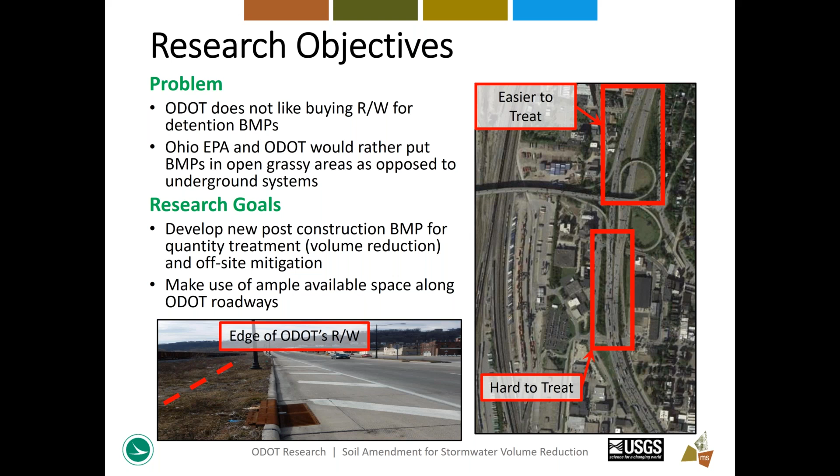As demonstrated by the image on the right side of the screen, narrow, impervious roadway corridors don't provide a lot of opportunity for stormwater management, except for underground detention or manufactured systems. These areas are hard to treat. However, the areas, as you can see in this image on the north side of this picture, have a nice wide grassed median that can provide more cost-effective stormwater treatment. That is what this prospective BMP aims to take advantage of.

This project was kicked off in May of 2017, which, as hard as it is to believe, was over 4.5 years ago. We conducted 1 year of existing conditions flow monitoring, which ran from March of 2018 to March of 2019. Monitoring was suspended during winter months because snow and ice may interfere with our runoff data and skew our results. I'll cover more details on the flow monitoring setup and the equipment in the next few slides, but essentially we wanted to establish a baseline and determine how much runoff is occurring along typical ODOT roadways currently.

Then we installed various amended soils, which again I'll cover in more detail in the next few slides. After the amendments were installed, we conducted over 1.5 years of post-amendment flow monitoring to see what impact the soil amendment had on runoff quantity. The runoff data analysis will be covered in detail by Greg a little later on. And now we're in December 2021, and we are wrapping up our final reports and recommendations to ODOT.

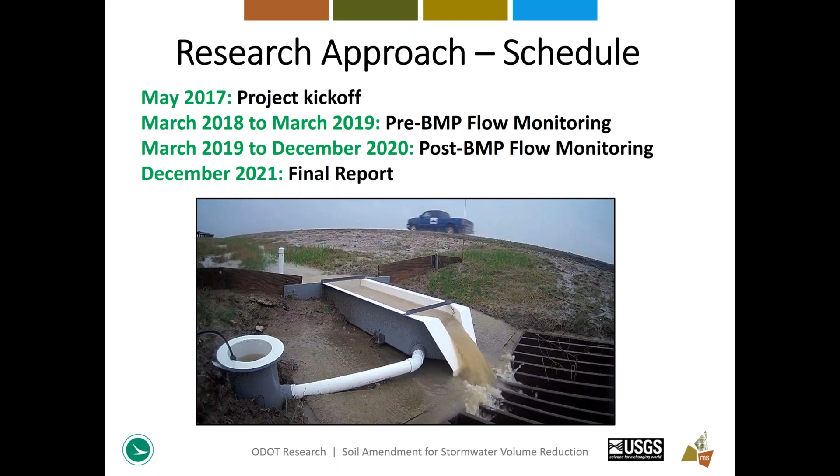The research team found sites across the state of Ohio that were ideal for flow monitoring. The criteria consisted of grass shoulders and side slopes within ODOT right-of-way. We looked for areas that were generally consistent with the current vegetated filter strip BMP, that is, wide, grassed, shallow slopes that receive sheet flow from the roadway.

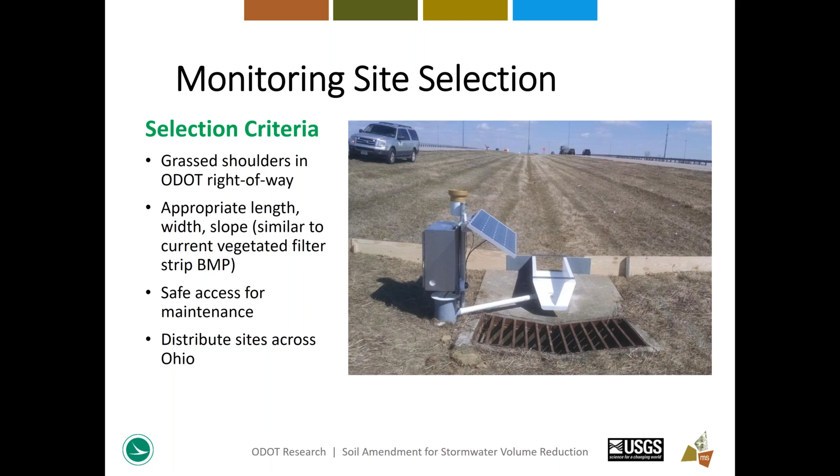We found that medians provided the best location due to the controlled drainage area. There is no contributing drainage area from outside the ODOT right-of-way, and a high percentage of the flow was from the paved roadway. We chose wide medians that provided ample safety for installation and maintenance crews. We also looked for areas with guardrails to protect equipment and crews when possible. Distributing the sites across the state allowed us to capture a variety of rainfall patterns.

This map shows the 12 monitoring sites that we selected. There were 4 along State Route 161 and State Route 16 between Columbus and Coshocton, and another 8 sites along US 30 from Bucyrus to Canton. 2 of these sites were control sites, which did not have any soil amendments performed. The control sites were co-located next to another site that was amended.

As you can see in this image, we've used a color coding system. The green and yellow boxes are there to show which sites were co-located with control sites. That color scheme will be mentioned later on by Greg. BMP 2 and control site 1 were co-located, and BMP 6 and control site 2 were co-located. This allowed for a direct comparison of runoff between an amended site and a non-amended site. The control sites also helped identify any major environmental or rainfall changes between the 2 monitoring periods and helped isolate runoff variables during data analysis. Again, Greg will cover this in more detail shortly.

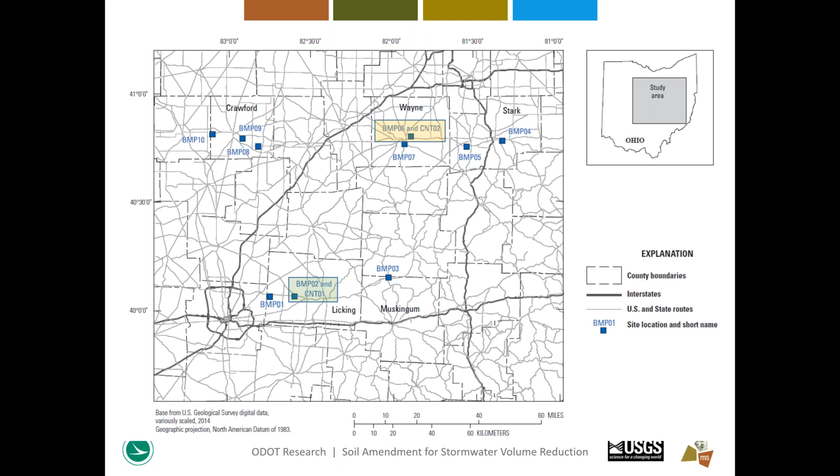This picture shows the monitoring equipment setup installed at each monitoring location. Rainfall was captured using a tipping bucket rain gauge, and flow data was captured through H-flumes, which were installed in the ditch line just upstream of an existing catch basin to capture all flow coming off the roadway. Wing walls prevented flow from bypassing the equipment, and during periods of runoff, photos and data were collected at 1-minute intervals and transmitted to USGS via cellular data, all this powered by solar panels.

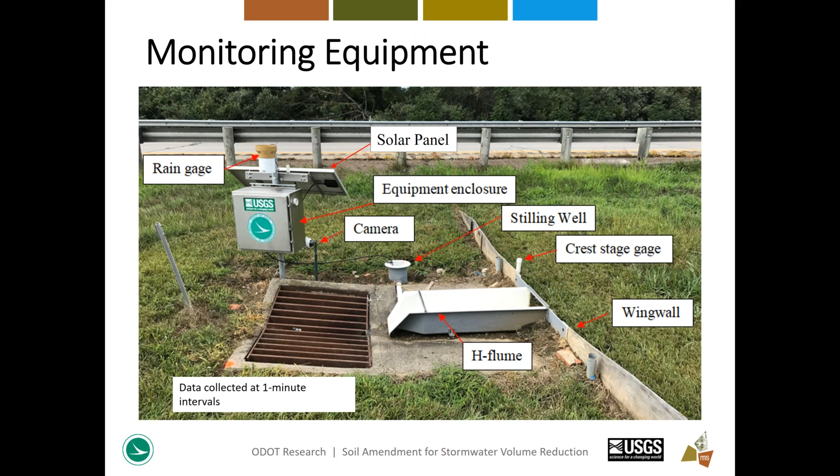The research team evaluated numerous natural and manufactured soil amendment materials with the intended goal of improving the soil porosity, texture, and capacity to hold moisture in order to improve the soil's long-term capacity for infiltration and exfiltration. The team decided that sand, expanded shale, and compost would be the best materials to install for field testing.

For those who don't know, expanded shale is formed when shale is crushed and fired in a kiln. This process causes tiny air spaces and air pockets in the shale to expand, making a semi-porous aggregate. The idea was that the sand or expanded shale could provide the infiltration and moisture capturing benefits, while the compost would provide vital nutrients and organic content to maintain robust vegetation, which will also aid in runoff reduction.

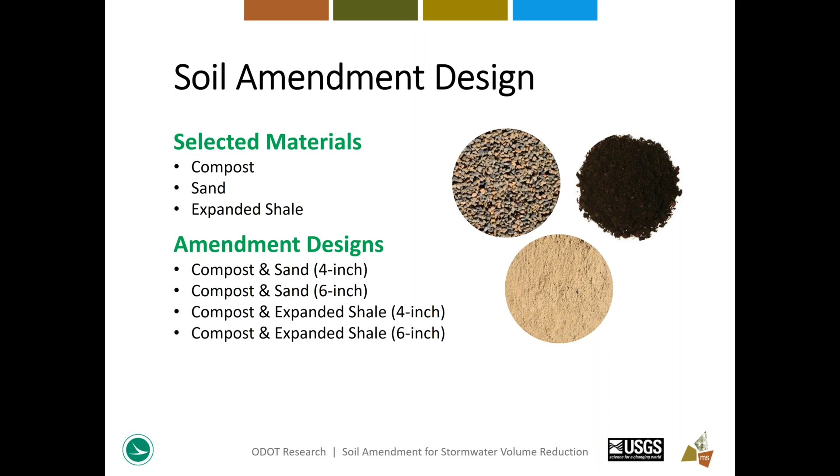We decided to leave the bottom of the median swale undisturbed. This is because we wanted to measure the effects of the soil amendment on the sheet flow across the side slopes, and not necessarily the soil amendment's impact on concentrated flow in the ditch line itself.

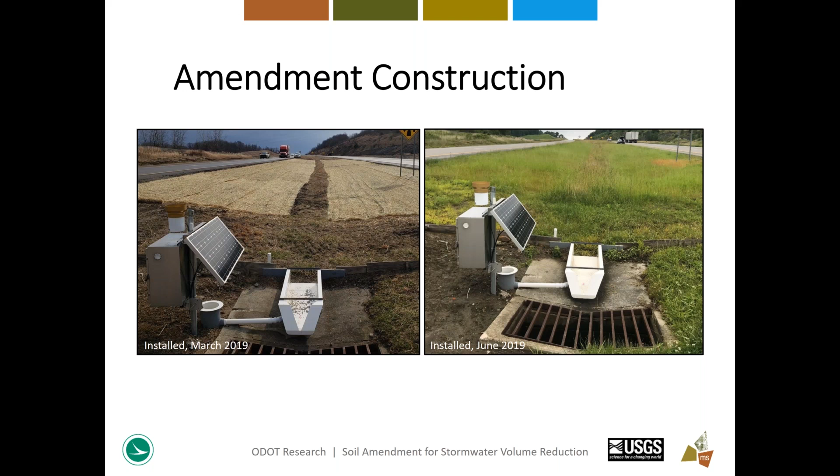These pictures show the monitoring sites immediately after the soil amendments were constructed. The image on the left is in March 2019, immediately following construction, and then a few months later in June 2019, after the vegetation had a chance to reestablish. Now I'll turn things over to Greg Colton to discuss how we analyze and compare the pre and post BMP flow data.

Thanks, Justin. So we ended up computing data for what we called events. An event begins when the first 1/100th of an inch of rainfall is recorded, and it ends when the measurable rainfall and runoff both have ended for at least 3 hours. The events were divided into 2 periods. One we called a pre-BMP period, which was before the soil amendments were installed, and the other was the post-BMP period, which is the period after soil amendments were installed.

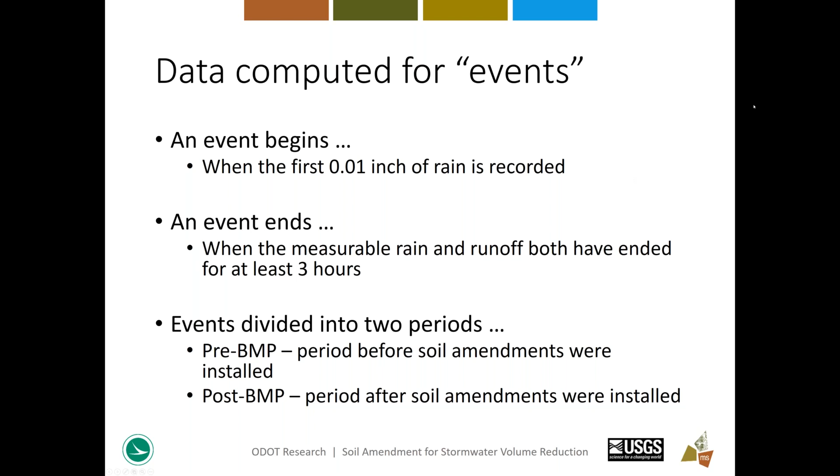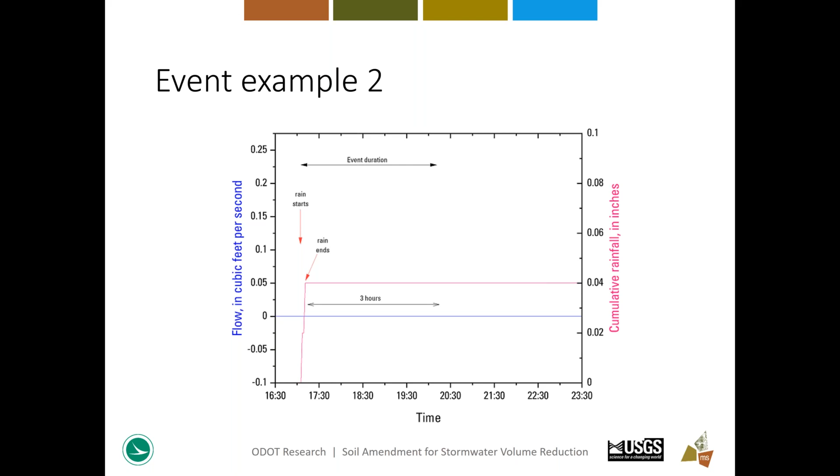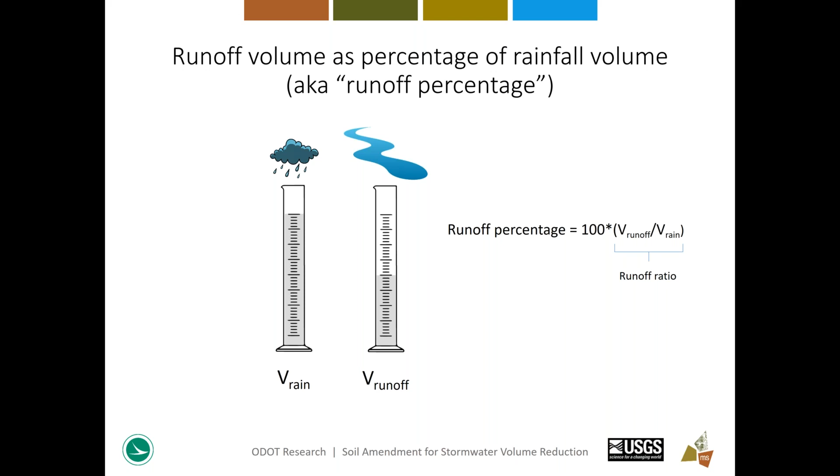So the rainfall totals were used to compute the volume of rain falling over the catchment. And the volume of runoff was measured with the calibrated H flumes. And it was divided by the rainfall volume, and that ratio is sometimes referred to as the runoff ratio, and then multiplied by 100 to convert it into what we call a runoff percentage.

So we computed information on event duration, event runoff, and event rainfall totals and intensities, and also runoff percentage for more than 4,200 events. And so it was an average of about 350 events per site.

And we noted several things. First, that the total runoff percentages varied appreciably between sites, even in the pre-BMP period. We also noticed that total runoff percentages did not decrease in the post-BMP period at all sand or shale amended sites. So there was not consistency within a given amendment type. And then we noticed that 3 of the 4 BMP sites with the largest decreases in total runoff percentage had sand amendments.

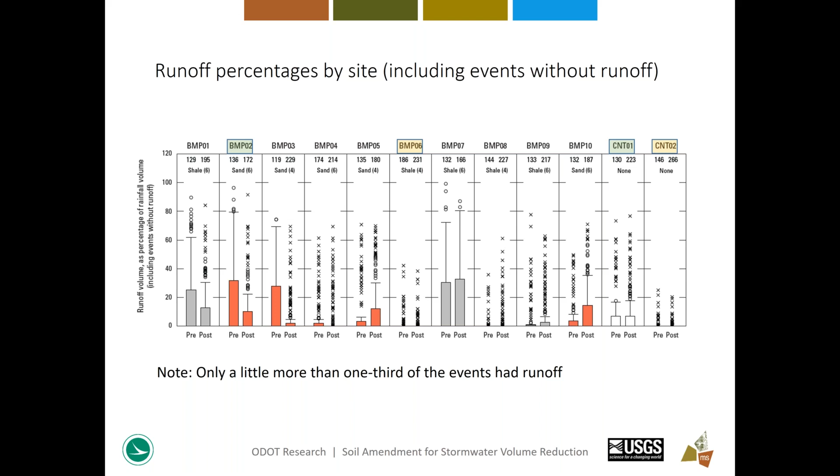So next one. So this plot shows the distribution of runoff percentages, including only those events that had runoff. And this is just being shown to make it easier to see the distributions of runoff percentages for runoff producing events. And in this case, since we've removed those events that don't produce runoff, you can see the median lines in the center of the boxes.

But the overall information that's provided on either of them is essentially the same. For example, we noticed the boxes seem to shift down for BMP02, but they shift up for BMP10.

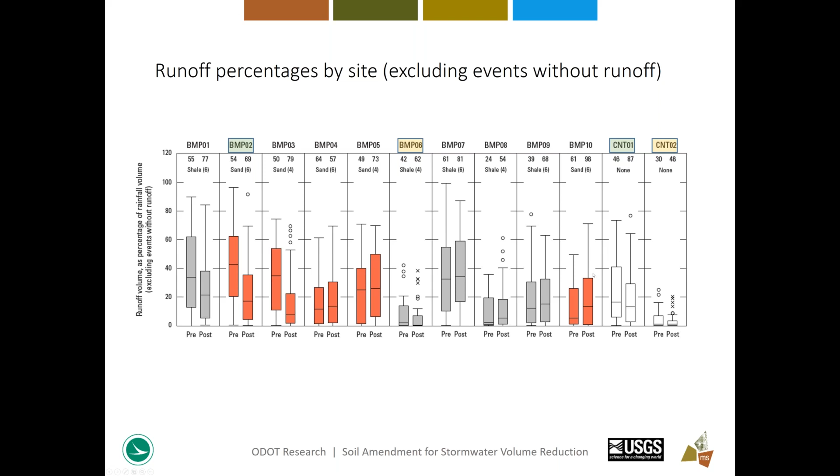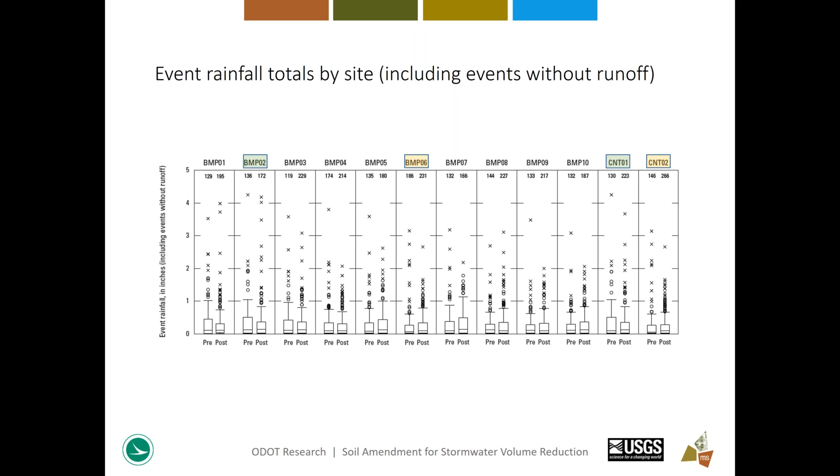So we wanted to ask the question, were there changes in rainfall characteristics from the pre-BMP period to the post-BMP period that might explain the observed changes in runoff percentages? So again, we looked at the distributions of various rainfall characteristics, and in this case, we're looking at the distribution of rainfall totals. And we were just looking to see if there was an appreciable change between the pre and the post-BMP periods. And what we noticed was that the distributions of the rainfall characteristics look pretty similar, both for the pre and post-BMP periods.

Another question we asked was, were there changes in rainfall and runoff from the pre-BMP to the post-BMP periods that were statistically significant? And so that was accomplished by examining the empirical cumulative distribution functions, or CDFs, of the runoff percentages and the rainfall. So this plot shows pre and post-BMP empirical CDFs of runoff percentages. That is, the runoff percentages plotted as a function of the proportion of observations less than the indicated value.

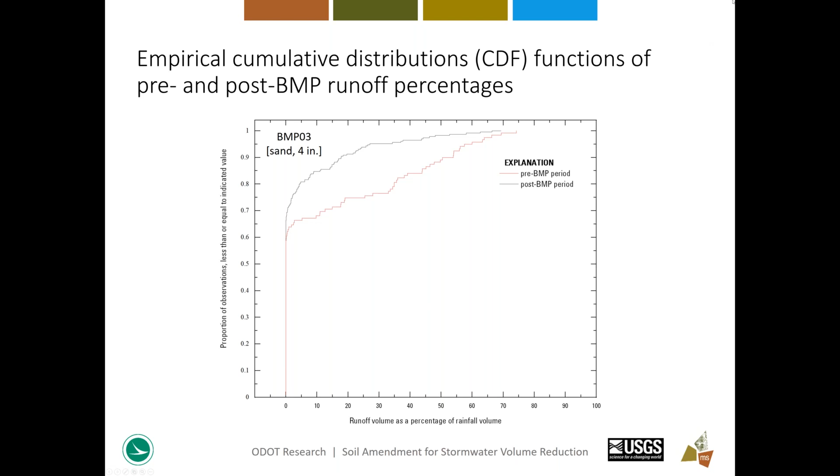This particular plot is for site BMP03 that received a sand amendment. And I just want to point out that the red line here is the CDF for the pre-BMP period, and the blue line is for the post-BMP period. So the plot shows, for example, that about 75% of the pre-BMP events had runoff percentages less than 20%. That's what's shown here. However, the percentage increased to about 92% in the post-BMP period. So we're seeing a larger proportion of the observations that have runoff percentages less than 20% in that post-BMP period.

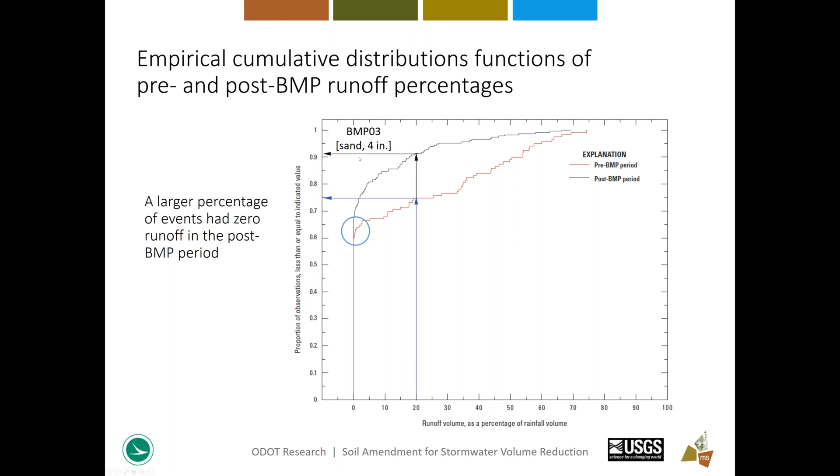It also shows that the percentage of events that had zero runoff increased from about 58% in the pre-BMP period to about 66% in the post-BMP period. So we were able to use a Kolmogorov-Smirnov test to determine whether differences between the pre and post-BMP empirical CDFs were statistically significant. The Kolmogorov-Smirnov test can detect shifts in the distribution as well as changes in its shape.

And only 2 sites, both with sand amendments, had statistically significant differences, irrespective of whether no-runoff events were included in the analysis. These were BMP02 and BMP03. Most of those sites had sand amendments. There were no statistically significant differences in the empirical CDFs of runoff percentage at the control sites, and there were no differences in event rainfall totals at any of the sites.

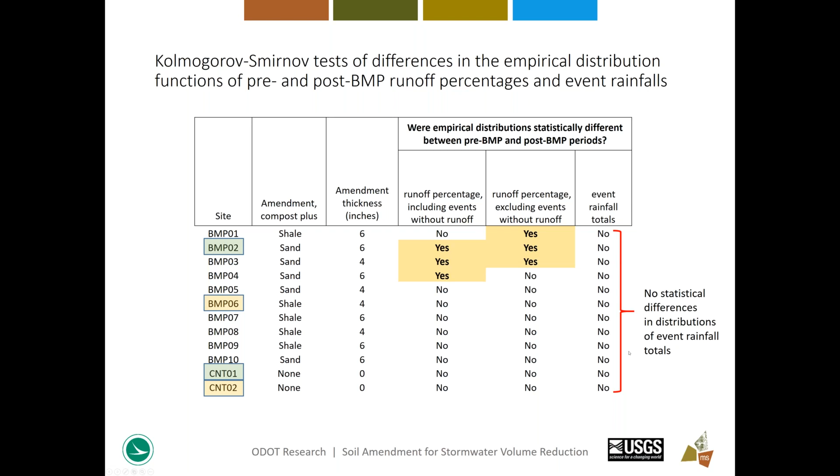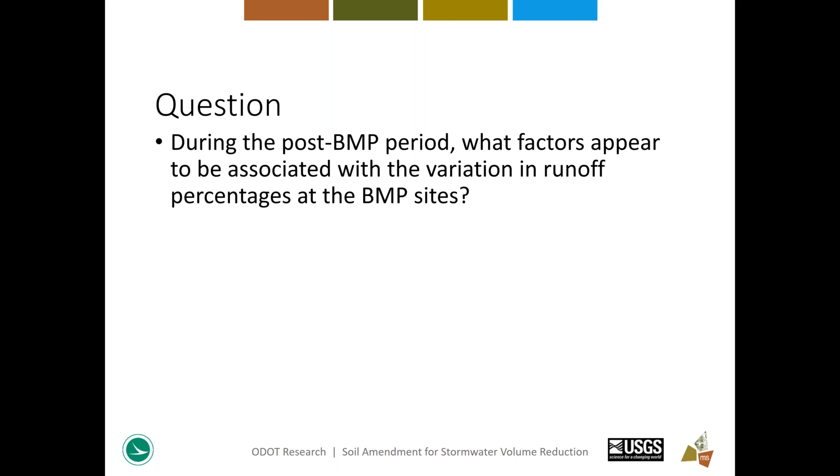The final question we addressed was, during the post-BMP period, what factors appear to be associated with the variation in runoff percentage at BMP sites? Sorry. So we used regression analysis to assess the relative importance of the factors associated with the observed variation in runoff percentage at the soil amendment sites during the post-BMP period. What we found was the event rainfall total was the most important factor, followed by a cross product term between event rainfall total and antecedent rainfall. The bottom 7 factors collectively had about as much influence on runoff percentage as the event rainfall total did. And we found that amendment thickness and amendment type were among the least important factors.

So, some conclusions we came to were that runoff percentages varied appreciably between sites, even in the pre-BMP period, that neither the addition of sand or shale amendments resulted in consistent reduction in runoff percentages, that 3 of the 4 BMP sites with the largest decreases in total runoff percentage from the pre to post-BMP period had sand amendments, that statistically significant changes between pre and post-BMP period CDFs of runoff percentages occurred at only 4 sites, 3 of which were sand sites and 1 being a shale site.

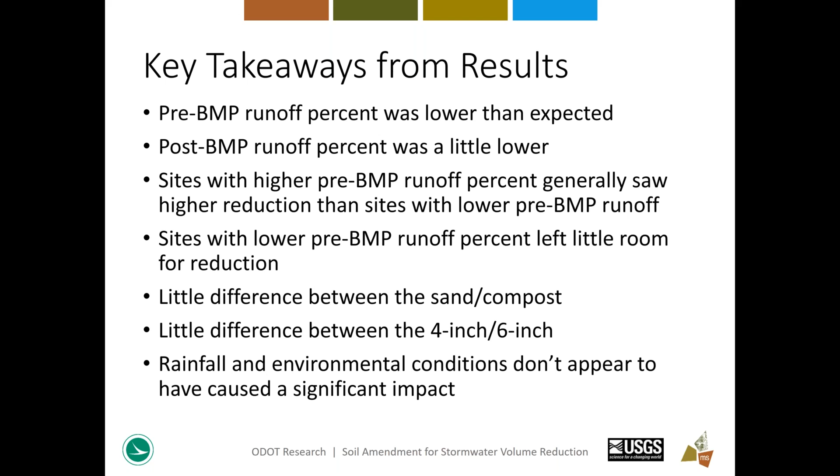Therefore, based on these conclusions and these key takeaways, MS Consultants has recommended that the amended vegetated filter strip, abbreviated AVFS, BMP be added to the ODOT Location and Design Manual as a water quantity BMP. Amending the existing soils provides soil quality benefits. We saw increased organic content of the existing soil. We saw increased nutrients, increased homogeneity of the top layer of soil.

We found the BMP to be space efficient, and it utilizes the grassed medians and the grassed side slopes along the ODOT roadways that are currently being underutilized. And the BMP can be incorporated into existing ODOT right-of-way with limited need to acquire additional property. The amended vegetated filter strip is low maintenance. It doesn't require anything more difficult than what ODOT is currently performing on the existing shoulders and medians. Just some routine mowing and keeping an eye out for rills and other signs of erosion.

Like I said before, while we didn't see a large reduction in stormwater runoff volume, what we did see was a slight reduction and low runoff in general, much lower than expected. The average post-amendment runoff percent was less than 25%. Again, a slight reduction from the pre-amendment period average of 27%. And the maximum runoff percent observed at any monitoring site after the amendments were installed was 37%. Again, down from a pre-amendment monitoring period max of 48% runoff percent. So by constructing the soil amendment BMP, we can at the very least increase the likelihood that runoff will be low.

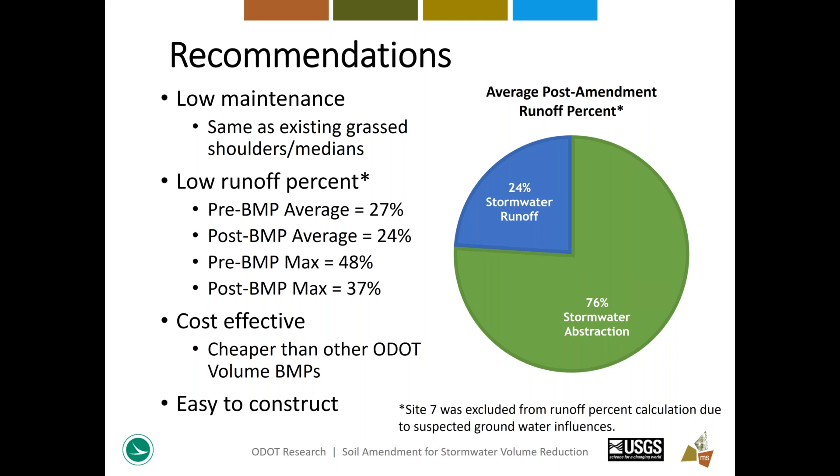The research team conducted cost-benefit analysis and found that the amended soil BMP is a cheaper alternative than the traditional stormwater BMPs currently used on ODOT projects. And I'll explain this in more detail shortly. The amended filter strip is also easy to construct, both for redevelopment projects and for new construction. MS Consultants recommended the following design standards. These are our preliminary recommendations, and we're still working out the details with ODOT, and more details will be available in the ODOT Location and Design Manual once everything is finalized.

But in general, our recommendations call for the amendment materials to be comprised of sand and compost. Again, this is because we didn't see much stormwater runoff benefit. Didn't see much difference between the sand and the expanded shale. So based on material cost, material availability, and really familiarity with the material as well, sand was the most effective choice. We also call for compost, again, for the nutrient and organic content benefits it provides to the existing soil and to the existing vegetation. And we are calling out a 6-inch incorporation depth.

Now, like I mentioned before, we didn't see a whole lot of difference in stormwater runoff reduction between the 4-inch and the 6-inch amendment depth. But we felt that the 6-inch incorporation depth provided a higher level of homogeneity and overall more consistent mixing of the amendment materials into the existing soil. So we ended up with a better mixture and an overall better product. So we are recommending the 6 inches. And again, not much cost difference between rototilling the soils to a depth of 4 inches versus 6 inches. So that was the most cost-effective solution.

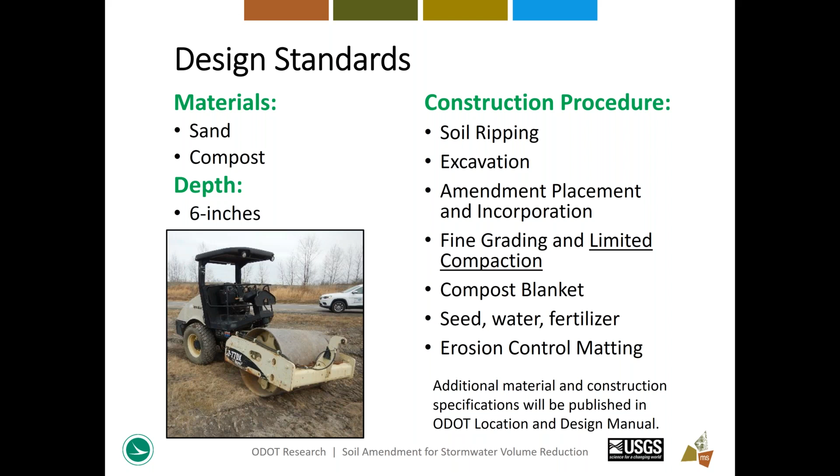So like I said before, this is just to reiterate, this is the construction procedure we're anticipating. And this would be for a redevelopment kind of site, if we wanted to amend the existing soil along an existing roadway, which covered all that, just to reiterate with pictures.

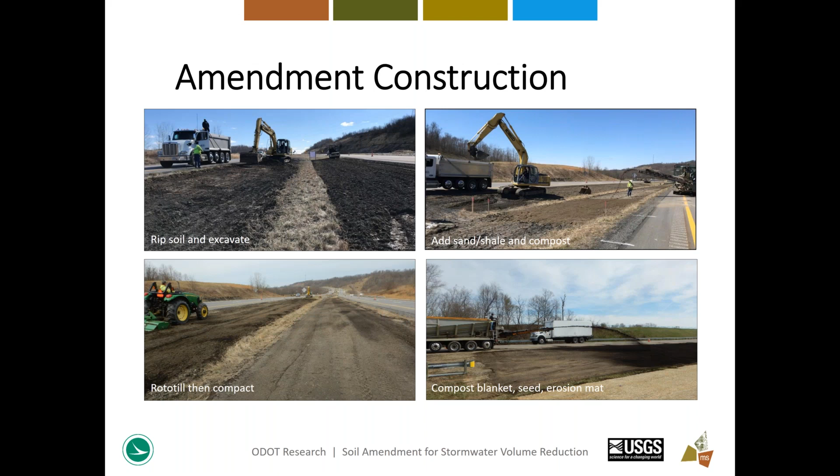MS Consultants has also prepared some design standards to accompany the new BMP design. Again, these are preliminary recommendations we've made to ODOT, and additional final details will be available in the ODOT Location and Design Manual. But the general guidance calls for a 2-foot minimum offset from the edge of paved shoulder. We don't want excavation or work being done right along the paved shoulder there, just to stay out of the road sub-base, anything like that.

We're also calling for a 2-foot minimum from the toe of slope or the ditch bottom. Again, the BMP is designed to be installed along the sloped roadway and is designed to treat sheet flow from the roadway, not intended for concentrated flows within a ditch bottom. 4-foot minimum width for the amended area. That's consistent with the current vegetated filter strip that ODOT uses. 3-to-1 maximum slope, again, consistent with the vegetated filter strip.

And that 3-to-1 slope max applies to both the amended area as well as any contributing area that's flowing to the amendment. So if the amended area is not started right at the top of the slope, but down the slope a ways, any contributing area that sheet flows to the amended strip cannot be greater than 3-to-1 slope.

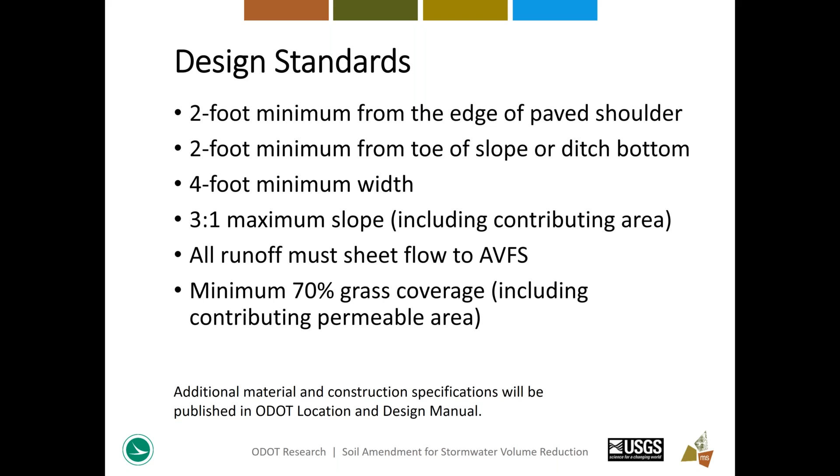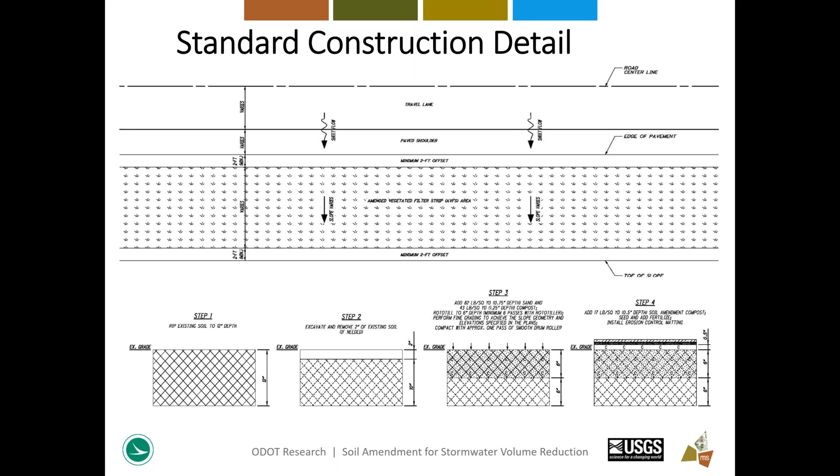So like I mentioned earlier, maintenance is minimal. It's going to consist of primarily the same routine mowing that ODOT currently performs along their roadways, especially with the typical grassed seed that we're applying here. Once these things are installed, the idea is that the casual observer would never know that anything was different from a standard ODOT grassed side slope.

But in general, the grass will be kept healthy, free of brush, woody vegetation, and then some routine inspection, which again is just keeping an eye out for signs of erosion or concentrated flows, rills, and gullies. And if any of those are observed, they should be repaired and stabilized in order to maintain the functionality of the BMP.

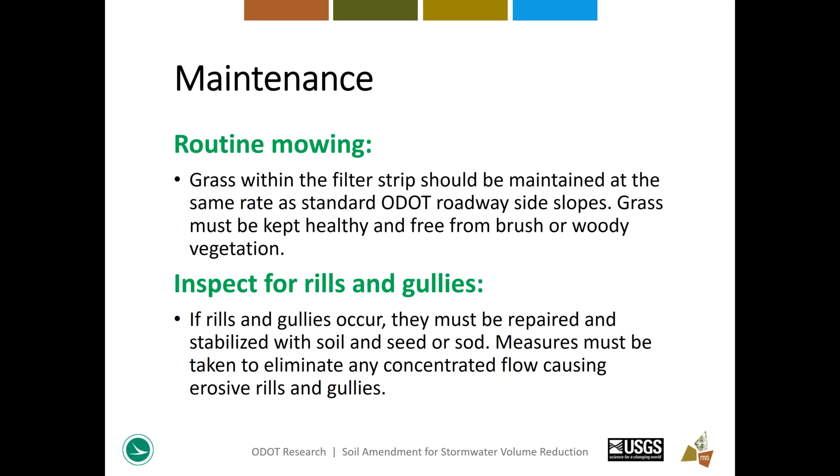So the research team conducted a cost-benefit analysis for the amended filter strip BMP. And what we found was that the construction process and materials associated with constructing this amended soil BMP overlap, and they share quite a lot with the materials and the procedures of a typical ODOT roadway project. So this results in a tremendous cost-sharing potential.

The geometry of the amended vegetated filter strips is the same as a typical grass side slope or grass median. It's seeded with the typical ODOT grass. Erosion protection is necessary for really any disturbed area along a roadway project. So all that means is that these items essentially become somewhat negligible in terms of the cost of constructing the soil amendment BMP. There's no specialized equipment. It's all standard excavation and grading equipment that any contractor would probably have on site anyway. The materials are all very routine. They're easy to obtain and readily available in Ohio.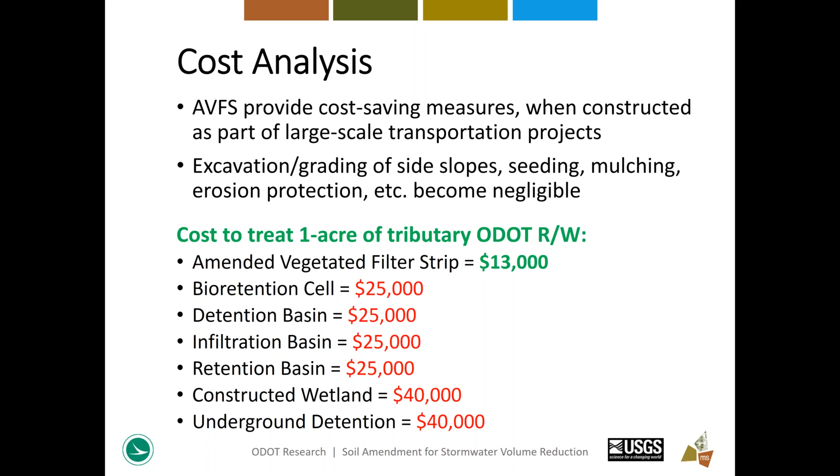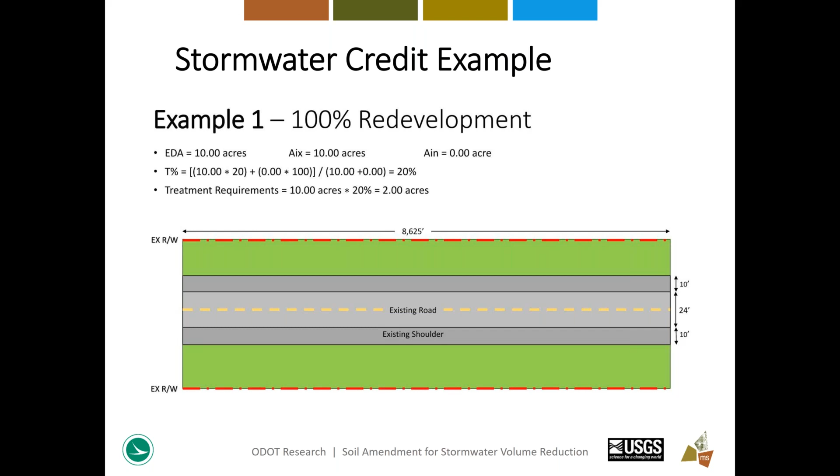So this image here shows an example of how the amended vegetated filter strip can be implemented on a typical redevelopment project. So this example looks at 10 acres of disturbed area, all within existing ODOT right-of-way. This results in a 20% treatment credit, and therefore for this example, 2 acres of ODOT right-of-way need to be captured and treated to meet post-construction stormwater management requirements.

So here is the implementation of the amended filter strip and how it's used to meet the ODOT stormwater management requirements. Based on the recommendations of MS Consultants, the amended vegetated filter strip area itself is given 100% credit. So any area that's amended is credited at 100%, while the tributary area within ODOT right-of-way, like the roadways and shoulders, that sheet flow to the amended filter strip are credited at 60%.

However, the maximum width of pavement or upstream area that you are allowed to take credit for is limited to the width of the amended area itself. So for this example, we call for a 6.5-foot wide filter strip along the road. So while the contributing area for this center crowned roadway example is 24 feet, we only take credit for 6.5 feet because that is the width of the amended strip. So at the 60% credit for tributary area and 100% credit for amended area itself, we get a total stormwater credit of 2.06 acres, which meets our 2-acre requirement.

I'll also note that this example assumes the crediting system that MS Consultants has recommended to ODOT. ODOT and the Ohio EPA are still negotiating the final crediting system. And so once that is finalized, it will be available in the ODOT Location and Design Manual.

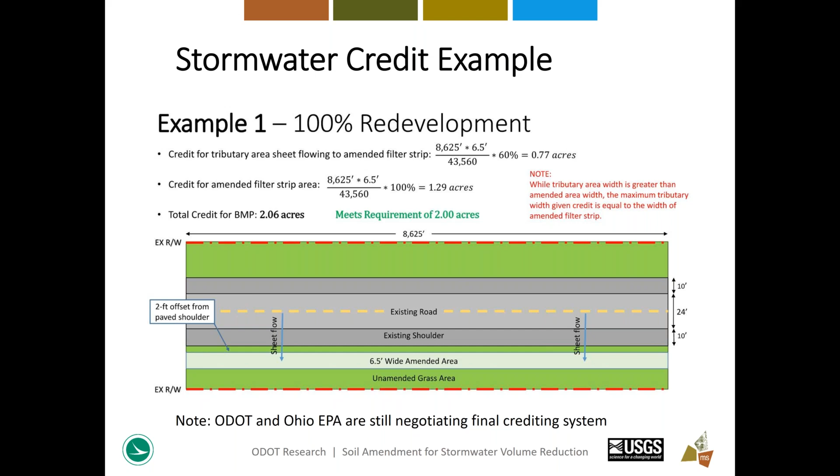So in summary, ODOT wants an alternative to underground storage and traditional stormwater volume BMPs that require extensive right-of-way acquisition. The amended vegetated filter strips are located within the existing grass area along uncurbed roadways within existing ODOT right-of-way. They are space efficient. They minimize right-of-way acquisition. The amended vegetated filter strips are good for offsite mitigation. They also increase the likelihood that runoff will be low.

The amended soils improve the soil quality of the native soils, which along a typical ODOT corridor is going to be a lot of construction fill. Ohio soils are not all that conducive to infiltration to begin with. So improved soil quality is a benefit, and they're also cost efficient and easy to construct, especially as part of a large scale transportation project.

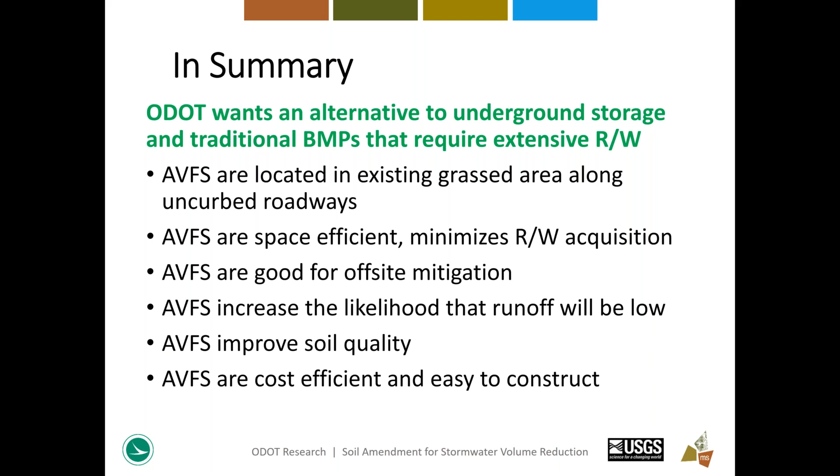And with that, I believe we have about 15 minutes to answer any questions.